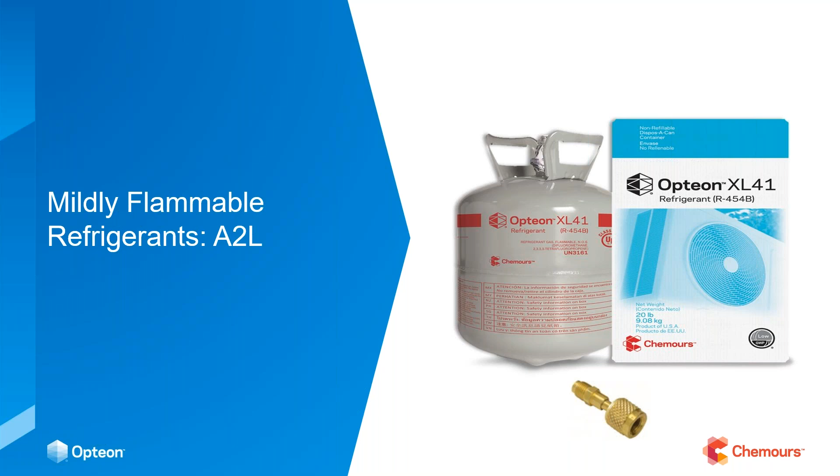So the first thing I want to talk about, the future of HFOs and HFO blends. Okay, that's the new kid on the block, the A2Ls, if you will. If you're not using ammonia, propane, CO2, you're going to be seeing HFOs and HFO blends, and a lot of them. So for the Chemours side, we're going to have the 454 series, ones A, B, and C.

Now the B, we all know, is going to be what most OEMs have picked for their comfort cooling. The A and the C will be used for medium temp and also low temp applications. The A will be for charges less than 200, and the C will be charges over 200.

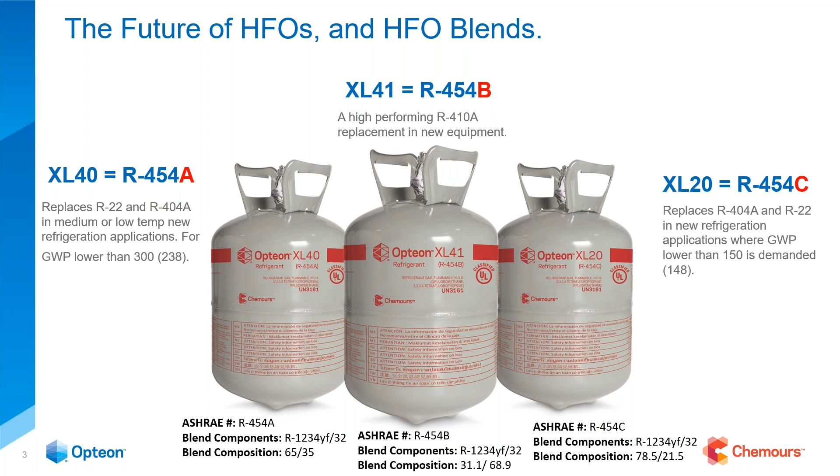Okay, the GWP lowers. Notice that the blends, all they do is we have R32 and 1234YF, and the blends just change the ratio if you look at the bottom of the screen. So it's really how I always say, how low do you want to go? It's how low you want that SST, that suction saturation temperature. Chris, you can advance the slide.

So what is an HFO? Let's talk about that real quick before we get into the flammability. So what makes this different than an HFC? Go ahead and advance. So in HFO, we had CFCs, that would be like your R12. We had HCFCs, that would be your R22s. And then we had HFCs, which would be, I'm going to use the example as R410A.

Now notice in the first two, the CFCs and the HCFCs, that first C is your chlorine, if you didn't know that. So notice that first C was removed in HFCs to try to deal with that ozone depletion, if you will. So we moved to the HFCs, and then we had some issues with, you know, the emissions it was putting out, some heat and what have you.

But when we talk about HFOs, quite honestly, gang, the HFO is nothing more than an HFC molecule in disguise. And what I mean by that, if you click it one time, Chris, if you notice those two carbon atoms next to each other, if you were to eliminate one of those, that's an HFC molecule. The point I'm trying to make here is the refrigerant's going to act just like it did before, there's not going to be a lot of difference.

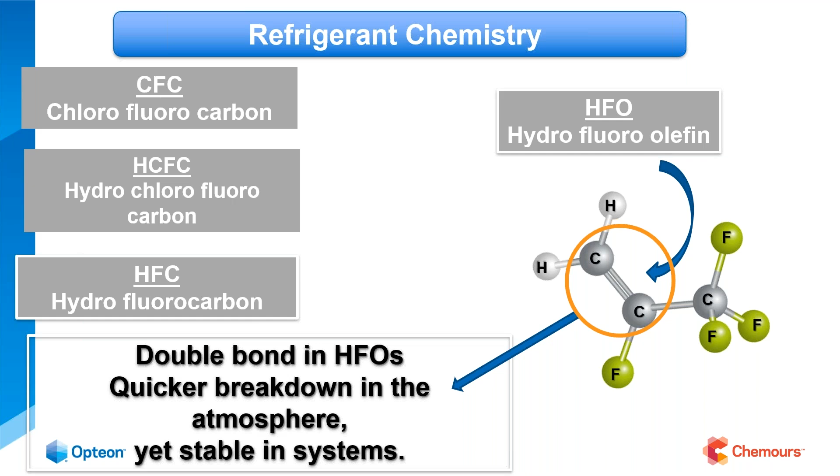And if you've already been around OEM equipment manufacturers, you'll see there's not a big change there either. It's still going to act like a DX system. But what the engineers and chemists found out years ago is that if they put two carbon atoms next to each other, it breaks up much, much faster in the atmosphere. So advance the slide, Chris, if you would. So one more time, Chris.

So we have the 134A molecule on the left-hand side, typically used in medium temperature, so like reach-in coolers for beer, pop, bologna, things like that.

And then we have that HFO molecule I just showed you, 1234YF, which is used for air conditioning, and it's in a lot of the blends we already use today, and it's been in a lot of the blends we've used for a very long time. What's great about it is it not only has capacity value, it also has a very low GWP. So if the EPA says this can only be this many GWP, it's a nice mixture to put in a blend to still get the capacity, but lower that GWP value.

So this is what I really try to connect with the contractors or the technicians in the field when I'm training in person. Notice our pressure temperature chart, pressure to the left, and the temperature at the bottom of the screen here. Notice the red and blue lines running almost parallel with one another. The blue is the 134A, used in automobile air conditioning, used in medium temperature. And then 1234YF, that's basically taking over the automobile industry as a single component. As long as it's a smaller charge, 1234YF HFO molecule can be used as a standalone refrigerant. Advance the slide.

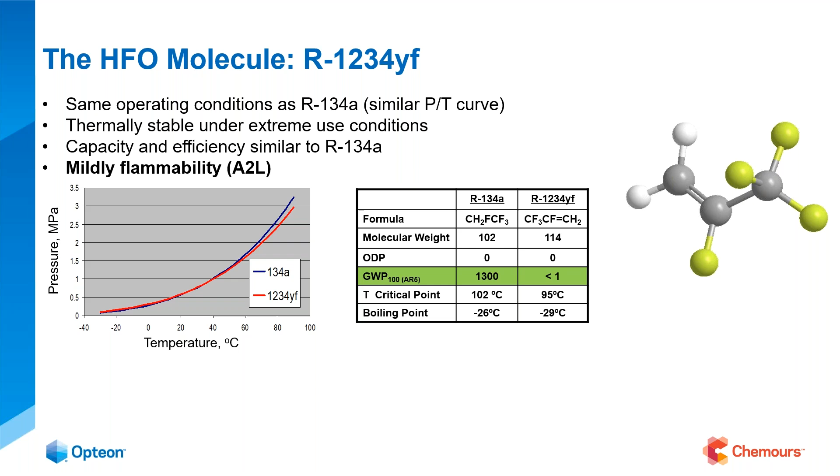We've got a poll question. Take it away. What two components make up 454 blends? Is it R32 and 134A, R32 and R125, R32 and 1234YF, or none of the above? Pick which one you think it was or is.

Are we seeing the polls come in, Corey? Yeah, I'll hop in here. It looks like we have about 80% of people saying R1234YF. So that seems to be the correct answer. Yes, that is the correct answer. Very good, gang. Let's advance the slide.

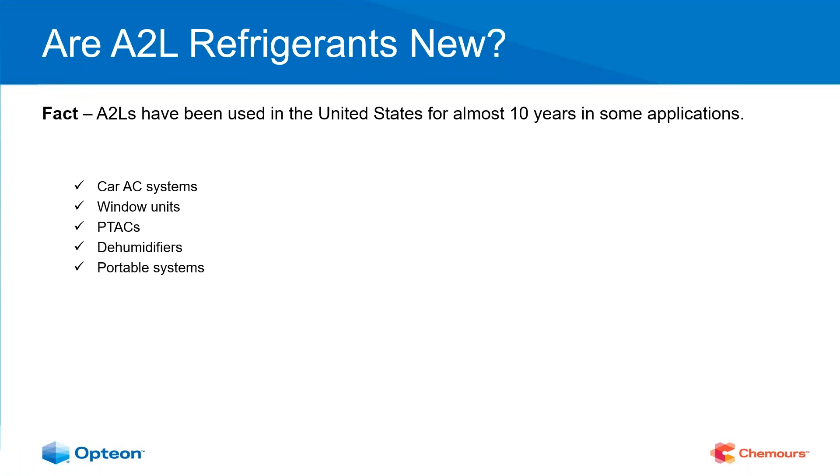Are A2L refrigerants new to us? Are they new to the world? Are they new to the US? They're fairly new to the US, but globally, Asia and Europe have been using A2Ls for quite some time. They got away from 410A a lot sooner than we did. We're a little bit behind the rest of the world, to be brutally honest with you. So let's advance the slide and see what that looks like. Go ahead and advance 5 of them.

So if you bought a new automobile in the last 8 years, you have an A2L refrigerant. Every car manufactured and sold in the United States has 1234YF underneath the hood. Not only is it a smaller charge with more capacity, but it's just a win-win for the industry as a whole. 1234YF, as you saw on your PT chart, very efficient refrigerant, smaller charge limits. And then a window unit, a PTAC unit, a dehumidifier, a mobile AC unit. All of these units for about the last 7, possibly 8 years have an A2L refrigerant. We just don't know about it. It's not on the national news or anything like that.

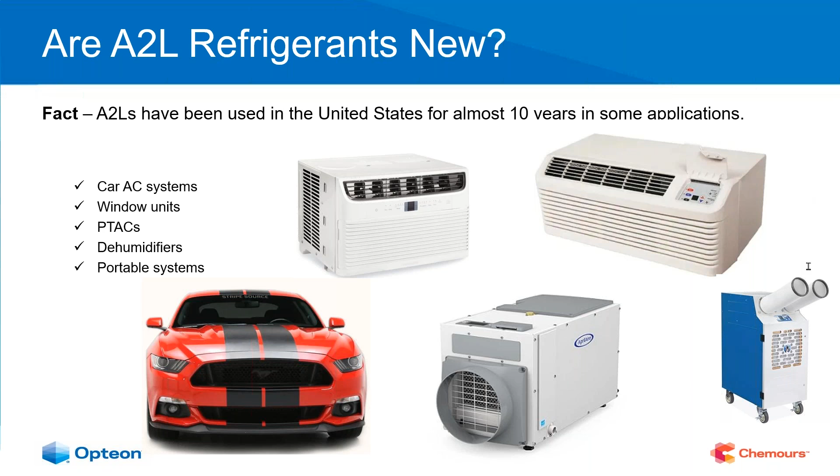But a lot of this stuff, like it or not, is Asian driven. And Daikin has some skin in the game with R32. So a lot of those things you buy in big box stores, like the window units, all come from the Asian driven market. We just don't make a lot of that stuff in the States. I remember not that long ago, if you're my age, we used to repair window units at the shop. We just don't do that anymore. It's kind of a throwaway product because you can buy it so cheap. But I would challenge you to check, the next time you stay in a motel, what your PTAC unit has refrigerant wise. So the takeaway is they're already around us. There's nothing to fear. They've been around us for some time. We just don't talk about it. Advance the slide, please.

So let's talk about the classification process. It's done by a third party, first of all, so it's an unbiased opinion. It's a company, organization that tests a lot of things, and then it sends it to the proper organization. In this case, it's the American Society for Testing and Materials, or ASTM.

They do all the testing, even though Chemours and our competitors and compressor manufacturers all have these testing labs. We want to make sure we don't have egg on our face, I guess, for lack of better definition. So they test it for us, and then they send those results to ASHRAE. Now, ASHRAE Standard 34 has to do with the toxicity and the flammability. And today we're going to be talking just about the flammability.

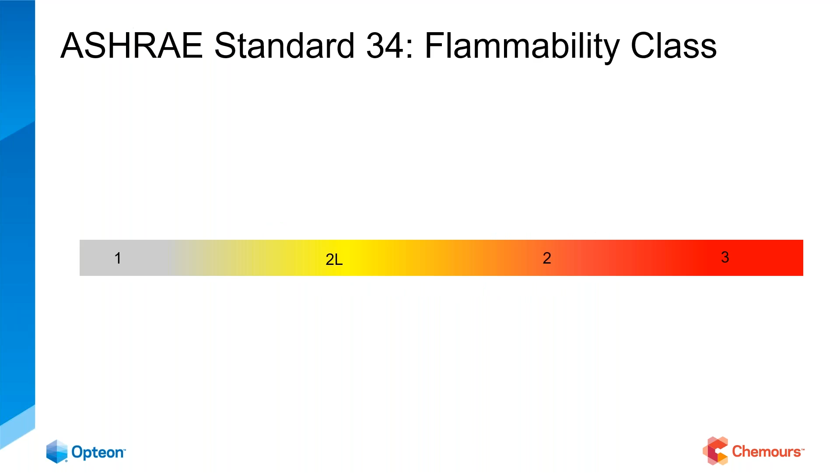Okay, so advance the slide. First and foremost, there is no propane in A2L refrigerants. Now, lock that away. That might be the next poll question. But in all seriousness, if you didn't know that, if you did know this, I can promise you a lot of the folks that are coming to the counters, that are out in the field, still are not aware of this. And we're going to kind of dive into why do they think that, and hopefully we'll shed some light on that. So I need everyone on the call to go tell 10 people there is no propane in A2L refrigerants. Next slide, please.

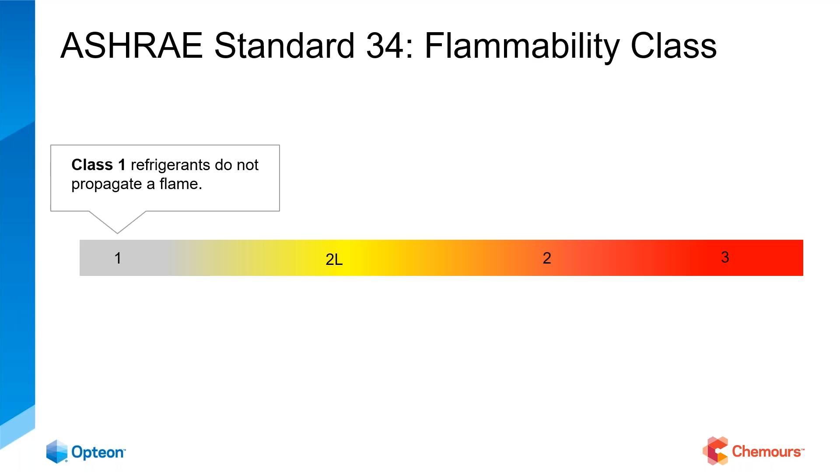So let's start out with one, Chris. Advance the slide. So up until not long ago in the United States, we had 3 classifications. We had 1, non-flammable, example would be 410A. Advance the slide. We had 2, example would be 152A, and this is considered flammable, by the way. And then we had 3, which would be like propane and butane, and this is highly flammable. Now we're going to come back to the new kid on the block, if you'd advance, to 2L.

Now notice they didn't make it 1.5 or anything like that. They used a 2L. The reason I point this out to you and use this last is because this is so new that they had to make a completely new classification to classify the HFOs and the HFO blends as far as the 2L is concerned. Now, the first letter that's omitted from this chart, A or B, is the toxicity. The 2L or the 2 or the 3 or the 1 has to do with the flammability. Again, 1 being non-flammable, 2L being mildly flammable or low flame propagation, 2 being flammable, and 3 being highly flammable.

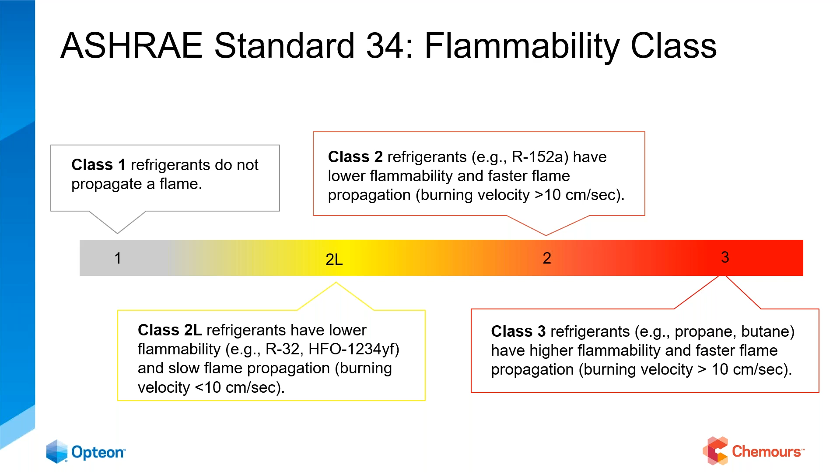And oh, by the way, if you're curious what that L stands for, this is what it stands for. It is the velocity at which the flame front propagates or burns, the speed at which it burns, okay? Again, less than 10 centimeters or greater than 10 centimeters. In the case of 454B, it's 5.2. So let's advance the slide.

So here's something you can find on AHRI's website. It's seen in almost everybody's presentation. Notice on the left-hand side of the screen, the increasing flammability. As the numbers go up, the flammability goes up. So we start with no flame propagation, and then we end up with higher flammability. Notice the lower flammability, A2L, that's the new kid on the block, and this is how new it is.

If you take your B2 classification, that was ammonia, and we've used ammonia since the turn of the century, so it's been around a long time. So this 2L classification is so new that when it came out, the ammonia folks looked at it and said, well, if that's a 2L, then we should be a 2L. Fun fact is ammonia, even though it's been used since the turn of the century, is now classified a B2L. Okay, so that's kind of a fun fact for you. Advance the slide, please.

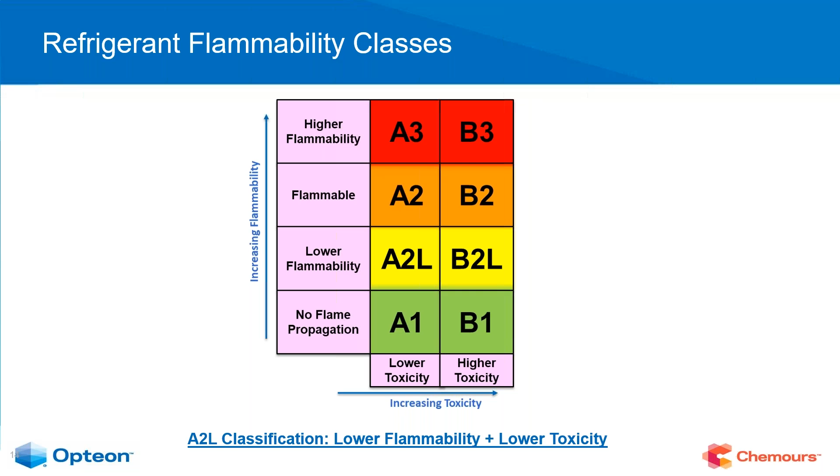So let's take a look at what this looks like. They start out with a glass flask in our chambers up at Delaware at the Discovery Hub, but this is what they're looking at in all the chambers. This is how they test it. They add just enough air, just enough refrigerant. It's corked in this glass flask. They add it in. They've got a computer connected to that.

They look for the perfect concentration, and then they hit some kind of ignition or electro or MIE. Okay, it's blended with this magnetic stirring device at the bottom, and they wait about 15 seconds for that blend to get just perfectly right, and then they hit it. Advance the slide.

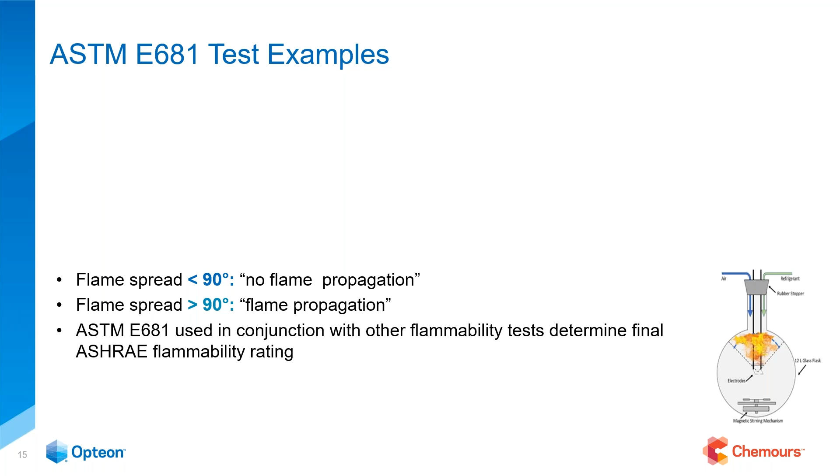So this is what 410A looks like. And we say it's non-flammable, but as you can see, there's a flame there. But the trick here is the V, or the blue 90 degrees there. This is the template they've used for years with flammability testing. And as long as that flame stays inside that V as in Victor, or that blue 90, it's considered no flame. Okay. Now, if you advance the slide, if it breaks that line, it's then considered flammable. And then it's just a matter of how flammable it is.

So when they tested A2Ls for the first time, this is what they saw. It just broke that template. Okay, that format that they use, that chemistry that they use, there's a formula they use that makes this V very important, the science behind it, how fast it travels. And you can see now that it's broke that line, so they can't move the goalpost, for lack of better words. They now have a flammable refrigerant on their hands.

To give you an example what an A2 looks like, picture that A2L picture, the flame being out to about the 9 and 3 positioning on the clock. Okay, so it's a big difference than an A2L. So therefore, they couldn't throw it in the A1 classification, and it was much less flame than it was for an A2. So therefore, this new classification, A2L.

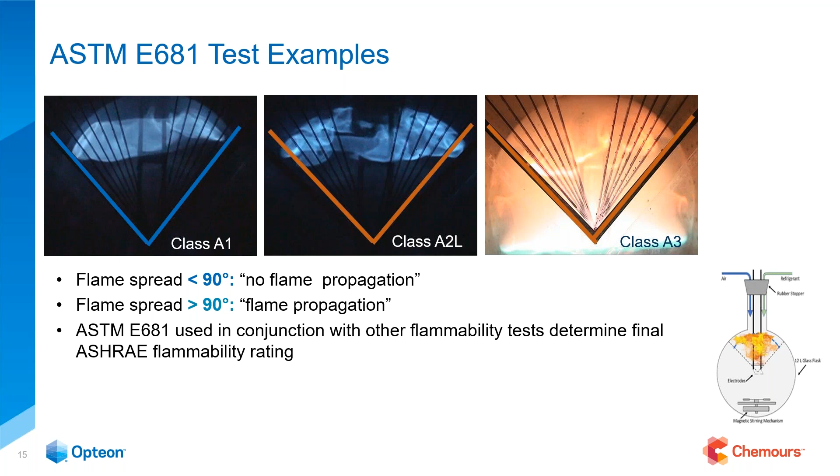So here's 410A. Here's an example of 410A. So if we didn't add propane to it, what did we do? So half of 410A, as you may or may not know, is R32, which is an A2L by itself, by the way. The other half is R125. Now, the two biggest things for my value on R125 is it keeps the discharge line cool because, as you may know, R32 runs a little warmer than other refrigerants. It has a higher pressure, but the biggest one is it keeps it non-flammable.

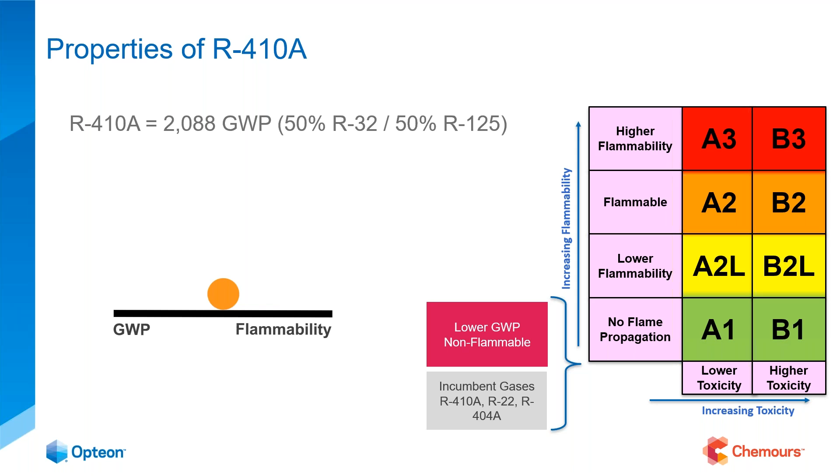If you didn't know, R125 is found in a lot of fire extinguishers. So it's the fire extinguisher that makes it non-flammable. And the way R125 works is when it's exposed to air, it sucks the oxygen right out of it. Okay, without oxygen, we can't have a flame, right? So advance the slide, please.

So here's what we did. It's a balancing act, if you will. Lower the GWP, raise the flammability. Most of the GWP value for 410A that the EPA didn't like was, in fact, the R125, the fire extinguisher. So we removed the fire extinguisher, we lower the GWP value to 466.

What Chemours did is they raised the R32, actually raised the A2L refrigerant up higher to 68.9 from 50, and then circled back around with that refrigerant that's underneath the hood of your car at 31.1%, 1234YF, HFO molecule owned by Chemours. Okay, so that's what they did. That is all that's in the 454B product right there. So they bumped up the 32, added the 1234YF, getting almost the exact same capacity and a better COP, as we'll see down the road.

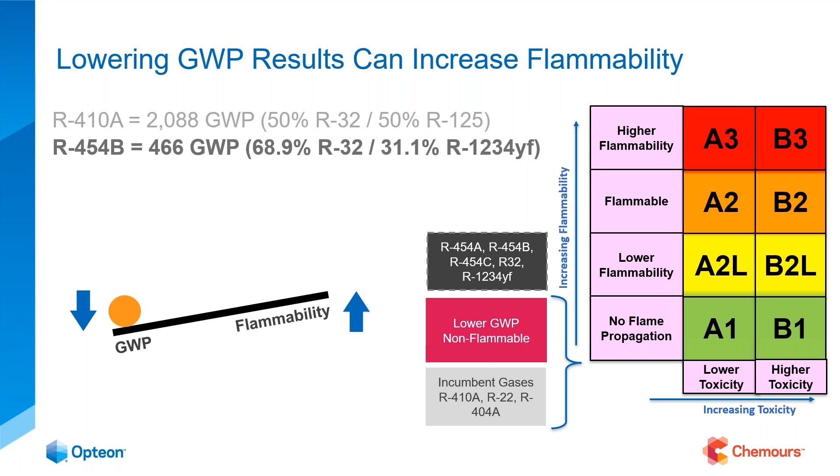Okay, the COP actually is raised, and the COP is nothing more than the capacity you're getting out of your evaporator compared to how much energy you're using on the compressor or the system as a whole. And 454 is much better than 410A and equal to R32. So advance the slide if you would, Chris.

So here's some things we put together. These are some common things that we know are flammable and what it takes to light them. MIE is minimum ignition energy, the spark, that little clicker on our grill. It's measured in millijoules. So the higher the number is, the less flammable it is, to put it quite simply. Methane is 0.47, propane 0.25. So that's really low and that's really flammable.

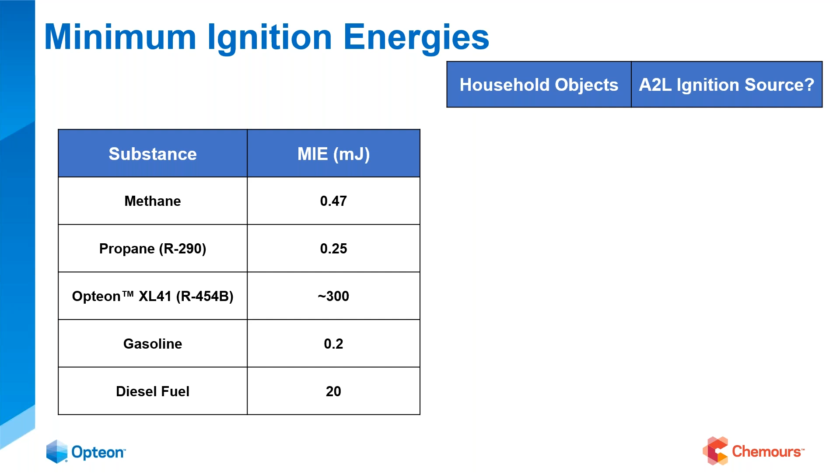When we look at 454B, we have approximately 300. Gasoline 0.2, and then diesel fuel a little higher at 20. Okay, so advance the slide if you would, Chris. So here we're going to look at some household objects on the left-hand side. Advance if you would.

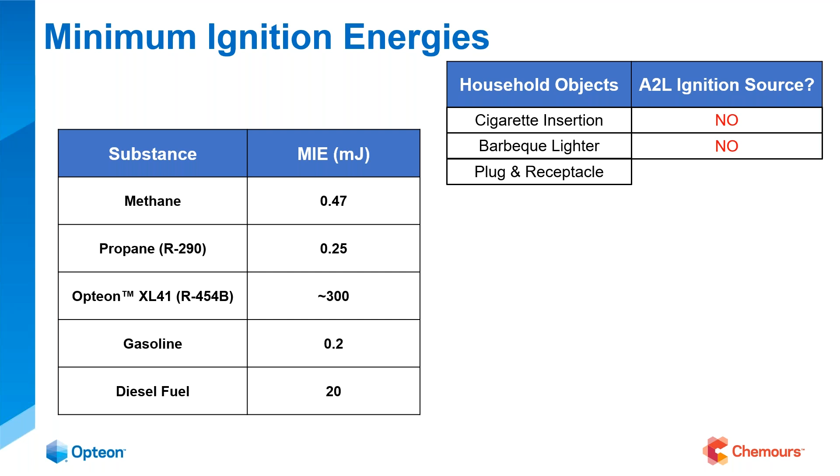These are the things that we are looking at. The cigarette insertion, does it light? A2L ignition, go ahead and advance. And you can go ahead and advance through all these, Chris, if you like. Barbecue lighters, plug receptacles, light switch, hand mixers, cordless drills, friction spark, hair dryers, toasters, hot plate insertions, space heater insertions. None of this will light.

All of these things have been tested not by Chemours, but by third parties. And there's not just one third party. There's been a lot of folks that have tested. I've seen many videos out there where they have these items in the plexiglass box, if you will, adding just enough refrigerant, adding just enough of the air to be perfect to light, and it just won't do it. And you'll notice that with the tools that are coming out too.

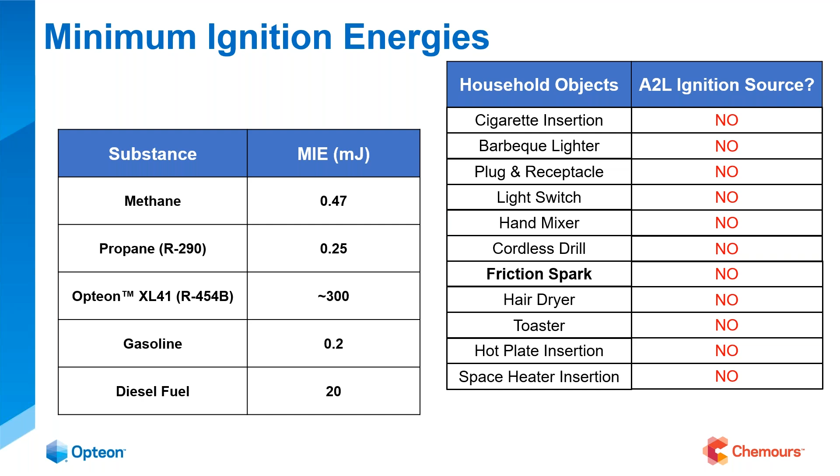A lot of the tools that are classified or rated A2L compliant, some of those haven't even changed. Some of them have, but some of them have not. And I've yet to have anyone come back and say, hey, that tool that you're using now is not A2L compliant. Check me if I'm wrong, and please send an email if you find something. But I have yet to see anything, and we all have worked with quite a few of the tool manufacturers. So let's advance the slide.

Hey, it's time for a poll question. What is the poll question? So what's the MIE for 454B, the minimum ignition energy that you need to light 454B? Is it approximately 25? Is it approximately 230? Is it approximately 300? Or is it approximately 0.25? We're missing a zero on that one. So 25, 230, 300, or 0.25.

Looks like we have the votes rolling in, and about 85% of people are saying option C, about 300. Perfect. Excellent. Good job. All right. Congratulations, everyone that got that right.

Now, I'm not sure, we can try to play this video to see if it comes through. Obviously, we had some technical difficulties. My computer was having some difficulties. I was going to play this through the computer with audio, but it may not play, Chris, the way we're set up now. So we'll just advance the slide and go past this. Advance the slide.

We're going to look at these one by one. The flammability limit, LFL or UFL: it has to hit at least LFL for it to be flammable. So for example, a lot of the sensors that are in the OEM's equipment, no matter what brand you use, UL required it to be no greater than 25% LFL. So no greater than 25% LFL means that it's not even close to being flammable. Until it hits LFL, it's not flammable. It has to be in this window of lower and upper flame limit, okay?

Minimum ignition energy is what we just talked about. What does it take to light it? Does it take a torch? Does it take walking across the carpet and touching a doorknob, or for instance like propane, that little clicker we use on our gas grill?

And then third, burning velocity, or SU, the speed at which a flame front propagates relative to the unburned gas. A fancy way of saying how fast it spreads. And by the way, this is the definition of the L, if you don't know. Okay, I see a lot of people say low flame propagation, mildly flammable, but this is the significance of the L.

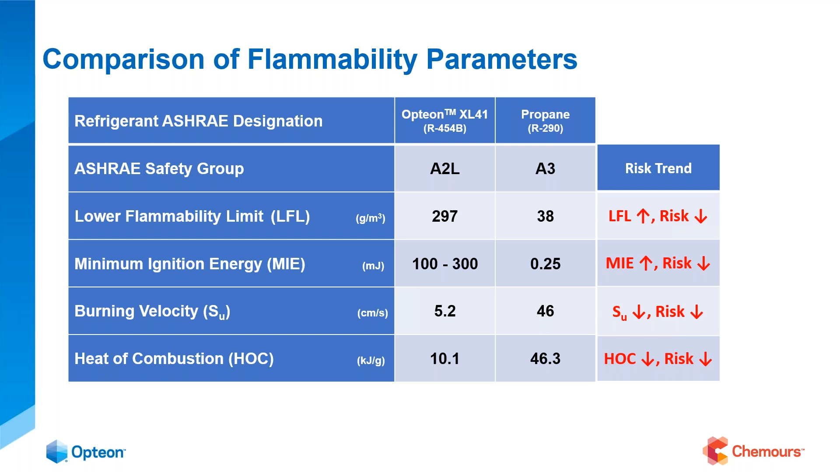So again, going back to those sensors that are going to be in the new equipment placed inside near the evaporator there in the coil box or the air handler, those are going to go off less than 25. In fact, most OEMs, the maximum I've seen is 20%. Some are as low as 12%. So they're not even close to being flammable yet before they go off, which I think is a great thing.

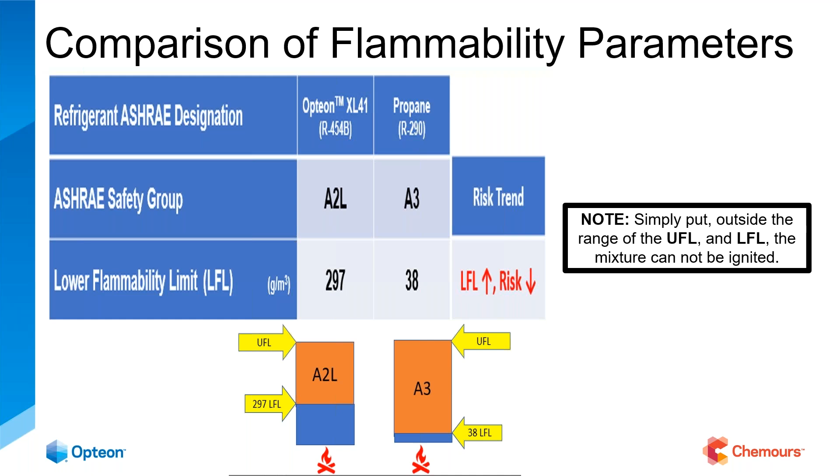Think of that sensor, in all honesty, as another safety switch. It's no different than your pressure switches, your limit switches, and all the things that we have already in our equipment today. If you weren't having leaks before at your evaporator coils, you're not going to have leaks now. It's just a safety net for peace of mind, if you will, and it's going to go off way lower than it even is flammable. So just something to think about. Advance the slide, please.

Hey, we got a poll question. What's the poll question? Pencils ready. What acronym describes burning velocity? Is it LFL, MIE, SU, or HOC? LFL, MIE, SU, or HOC? What acronym describes burning velocity, or that L, the speed at which it travels? This is a hard one. Maybe not if you work backwards.

All right, we have some votes rolling in. It's a little bit of a split decision here. We have 30% of people saying LFL, 15% saying MIE, and 54% saying SU. So we still have the majority saying SU. And SU is the correct answer. I probably made that a little trickier. I literally just made these questions up this morning. So, the LFL is your lower flame limit. So let's talk about that just a little bit to make sure we're all on the same page here. Can we go backwards, Chris?

Right there is fine. So that LFL, again, that's that window where it has to hit that. Until it hits that LFL, it's not even flammable. MIE is what it takes. If you were to Google MIE or minimum ignition energy, you would see a strike, like a match, basically. How much energy does it take to light it? Is it a torch, or is it walking across carpet and touching the doorknob with that static electricity? How easy is it to light? And then the correct answer, SU, is the burning velocity, and that's the one for the L. That's the speed at which it travels. Heat of combustion, of course, is just HOC. So we can advance back where we were now, Chris.